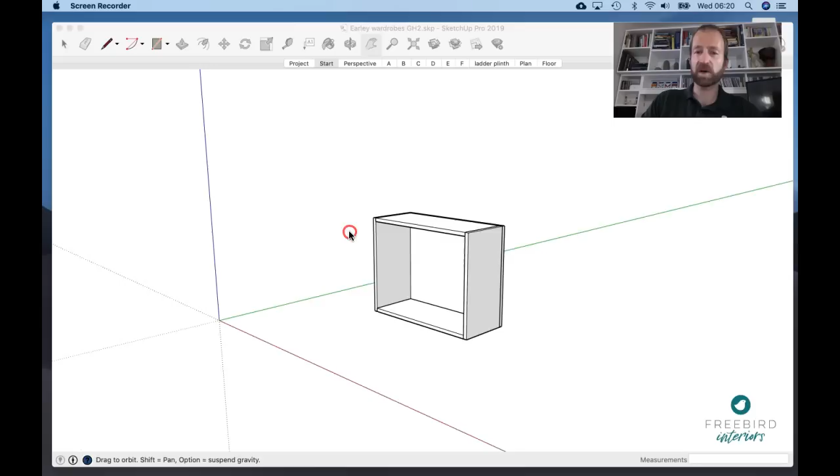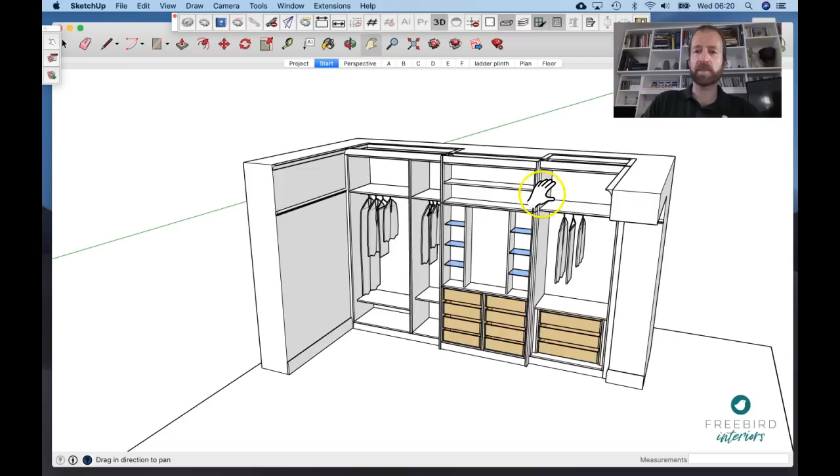And what I want to do is to show you how to make a simple carcass like this. First off, though, I'm going to just talk you through how to get started downloading SketchUp, how to get hold of it for free, demystifying some of that. And before that, I wanted to show you a little bit about what we do with SketchUp so you know what's possible. And I don't mean this to be intimidating if you're an absolute newcomer, but I just want you to know that if you are considering what sort of software you might move ahead with, that in my opinion SketchUp can do probably everything you're hoping to do.

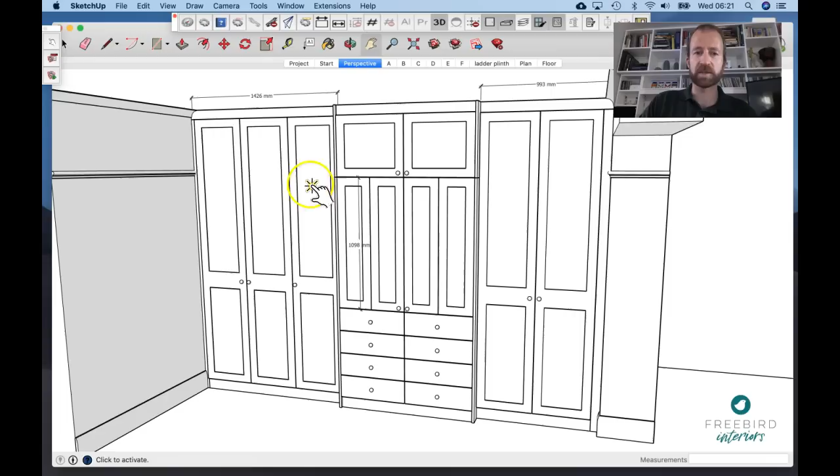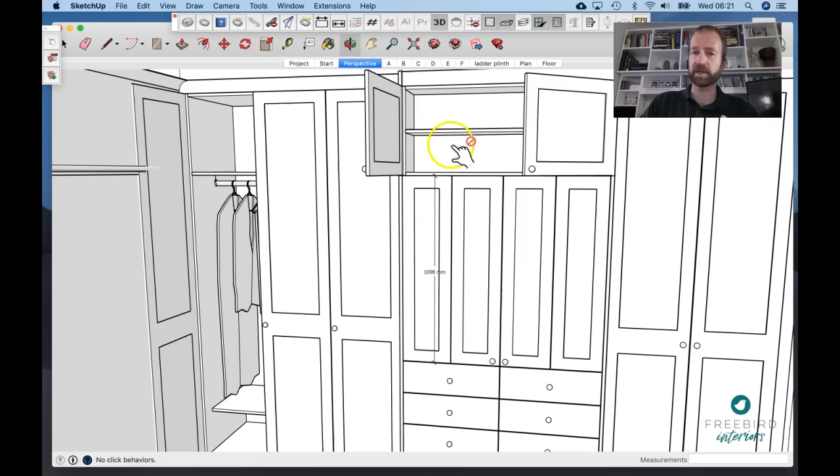So this is an example of a recent project that we've worked on. We can now draw full carcasses with doors on and show the customer exactly how it's going to be from outside and inside. We can animate the opening of doors, drawers, and we can put hardware in. And the really powerful thing now is that we can use these drawings, which are accurate to the millimetre, to output to cutting lists. So once we've drawn them in SketchUp and they exist in 3D,

every one of these parts can be optimized onto a sheet, and we can even tell them to have scribing allowances. So for example, where we've got our scribe strips hitting the wall, it can be drawn to that width, but it can be outputted with an extra 20mm scribe in case of the need to cut it on site.

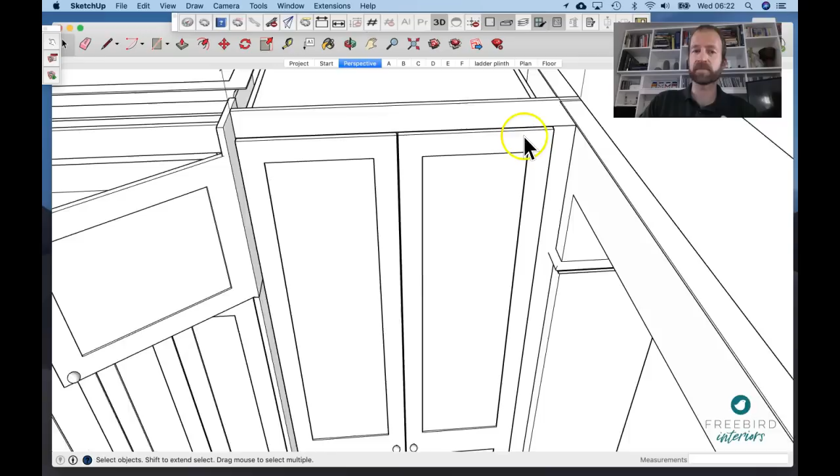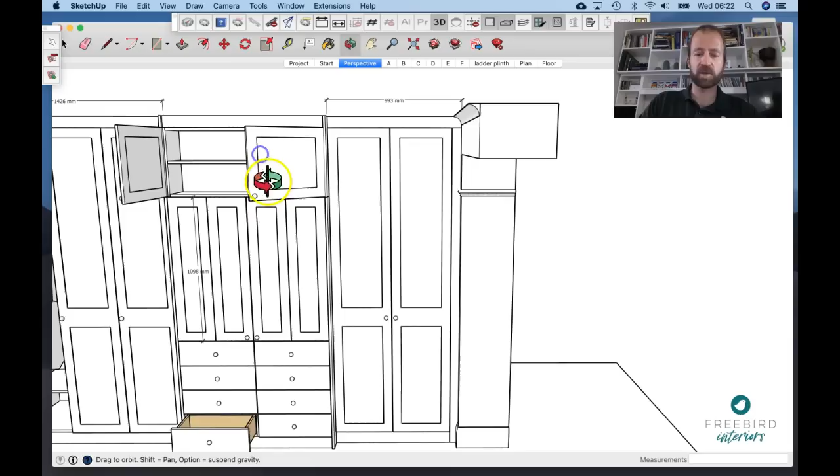So over the years I've tried different things. My background was in architecture. I tried a piece of software called CabinetSense. In fact, I spent £2,000 on that, which is really made for this cabinetry industry. And I just kept coming back to SketchUp because it's very flexible, intuitive, it looks great in front of customers, you can quickly produce drawings, and that's something we do, is we will draw something like this in front of customers now. And I found that CabinetSense was demanding more and more money, even for what I thought should have

been fairly basic features. It's only relatively recently, with the use of certain extensions, that we've got this kind of functionality from SketchUp. So if that's where you want to go, stick with me, because I will be working towards this kind of use of SketchUp, and I'm not going to be giving you stuff you don't need to know that's not particularly relevant to being a woodworker or specifically a fitted furniture maker in the UK.

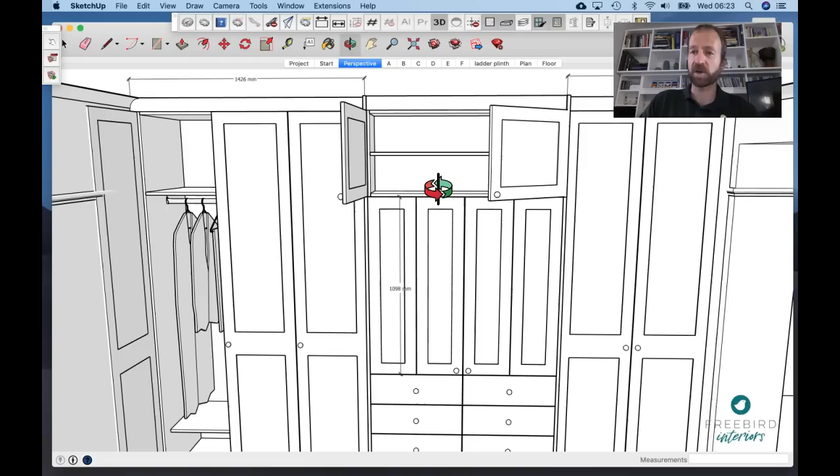So let's get on to how you get hold of SketchUp. Now I suggest you just type SketchUp download into your web browser. And there are two routes you can go down. I'm going to show you both briefly. The relatively new development with SketchUp is what's called SketchUp Free. That is a web browser based version of it. I'm just going to give you the overview of that, but I'm not going to do most of this tutorial on it because the interface is different to a lot of the other tutorials that you would find online.

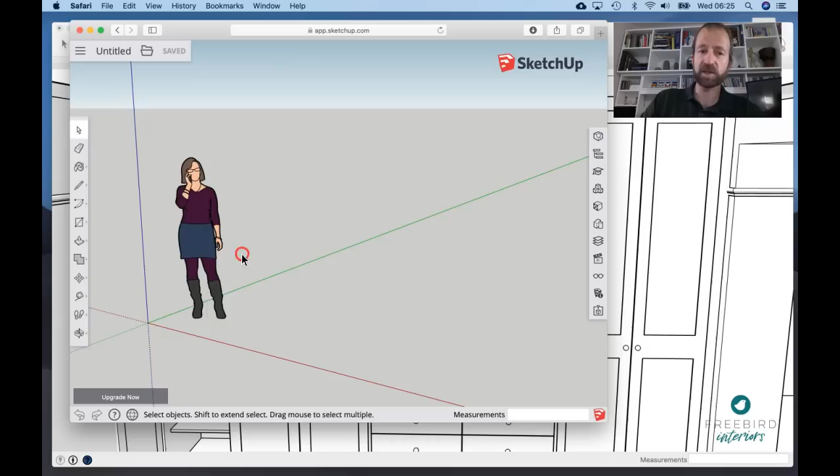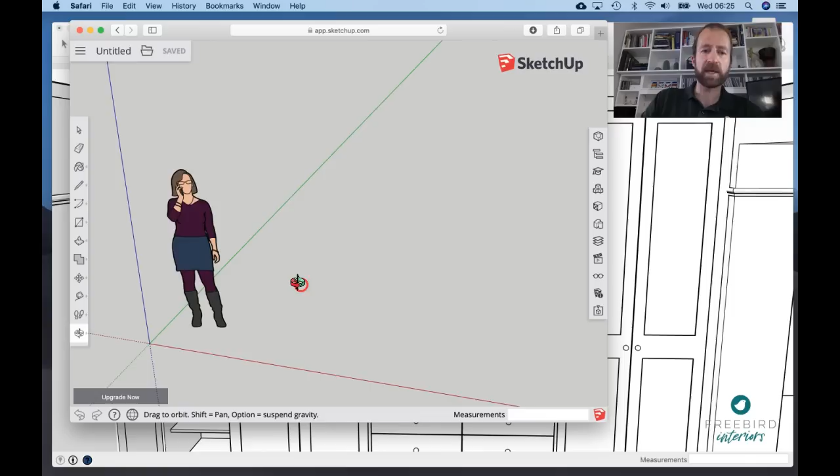However, this is a pretty fully featured version of SketchUp. You will have to create a Trimble ID, so you'll have to log in, which you can do with a Google account, and that's no trouble really. That really just allows you to save your files in the Trimble Connect, as it's called. So Trimble now owns SketchUp. There's a lot you can do in here, but it's much the same as what you will see in SketchUp Make, which is what I want to show you mainly.

So to get to SketchUp Make, what I actually suggest you do is go to SketchUp Download All. So just Google that and find this web page, sketchup.com/download all. It's a bit hard to find directly on the SketchUp site. Now this gives you a list of all the downloadable desktop versions. The ones at the top you're going to have to pay for, the Pro versions. This is the old SketchUp Make, which they're now discontinuing, so they're not updating this, in favour of the free version on the web.

But this is a really great place to start, pretty fully featured, and in fact when you download it you get the Pro version for 30 days, so that causes some confusion. You're actually working on the Pro version, that expires after 30 days, but that just downgrades to Make, which is the free version. So you will continue to be able to use that legally, although strictly not for business purposes ongoing. So you can download your Windows or your Mac version.

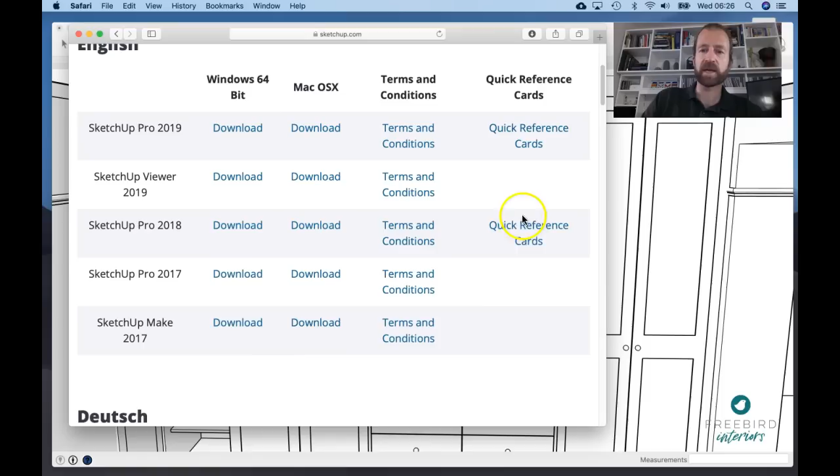Before I leave this page, do take note that you can download some quick reference cards here. This one for Pro 2018 will be near enough the same. Choose your Windows or your Mac. I suggest you download and print this and keep this in front of you, because this gives you the keystrokes which will enable you to more quickly go to the tools that you use.

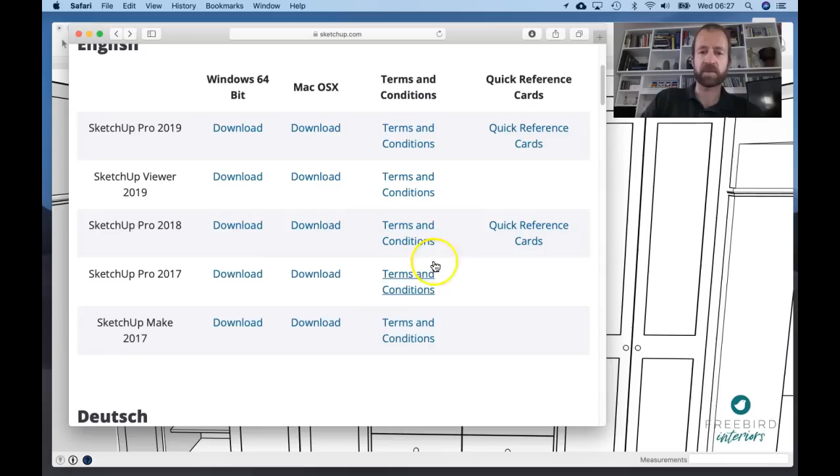So you hit download there on SketchUp Make. I've already done that, so I will bring it up. That's this one. So start using SketchUp down here. It will prompt you to choose a template when you first use it. I suggest you choose the one that's near the top that has this white background and that says it works in millimeters.

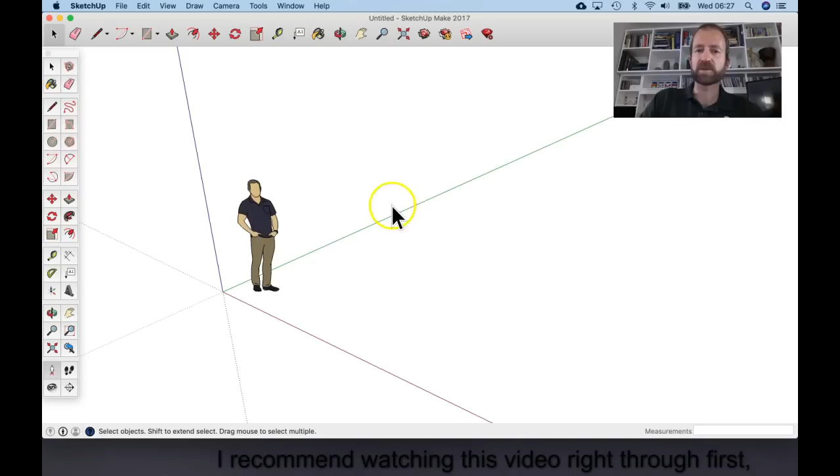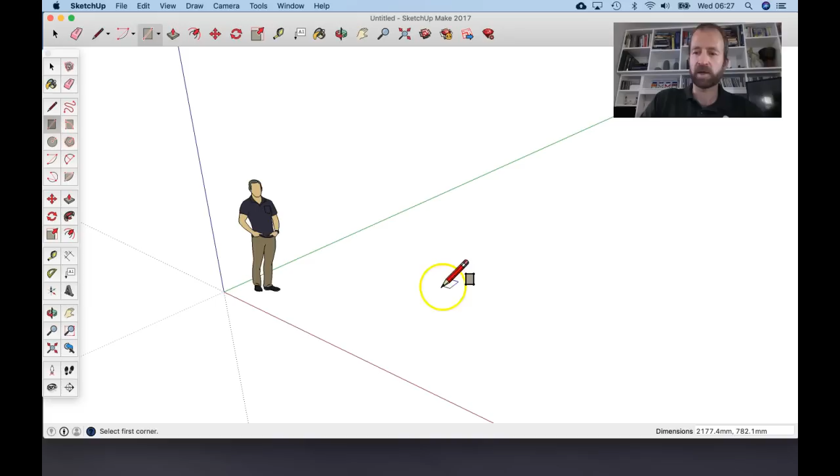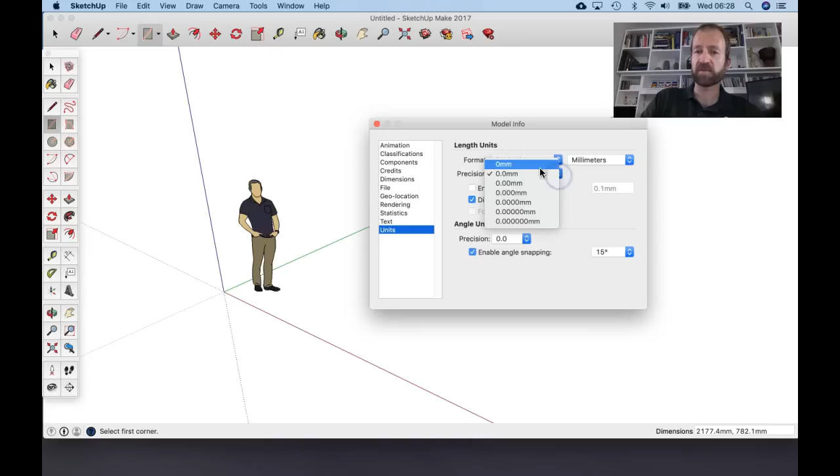If you do find yourself in a template that you discover isn't millimeter based, which you'll find once you get drawing, because you'll see down the bottom right there dimensions once you start using drawing tools. If that's not in millimeters, go to Window on a Mac, Model Info. It might be a slightly different place on Windows, but I'm sure you can find it. So Model Info and Units. And then here you can choose the format and the units. So personally I'm usually working in millimeters, and personally I prefer for it to just be rounded to the nearest millimeter, but you can choose very high levels of precision.

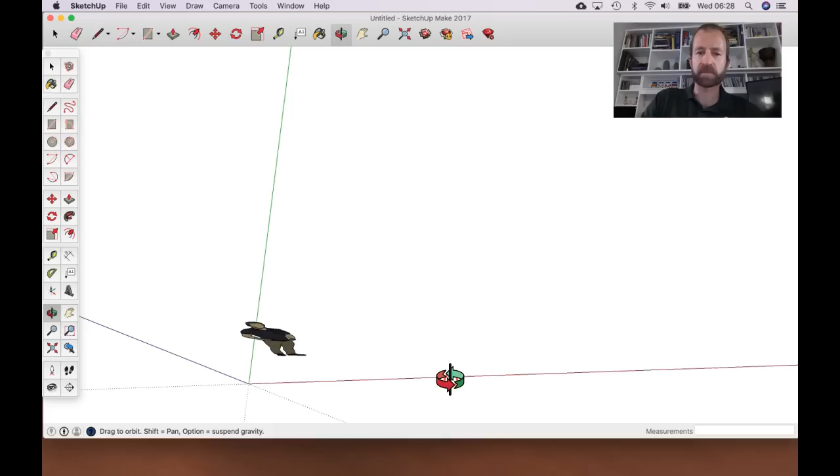So to start with, let's familiarise ourselves with the workspace. What you've got here are axes. So if you think back to school days working on graphs, you had your x-axis going along the bottom. So red is x, your y-axis going that way, green is y, and the z-axis is heading upwards for 3D space. This is the sort of thing that will be helpful as you get more advanced in SketchUp, but just a basic understanding is fine for now.

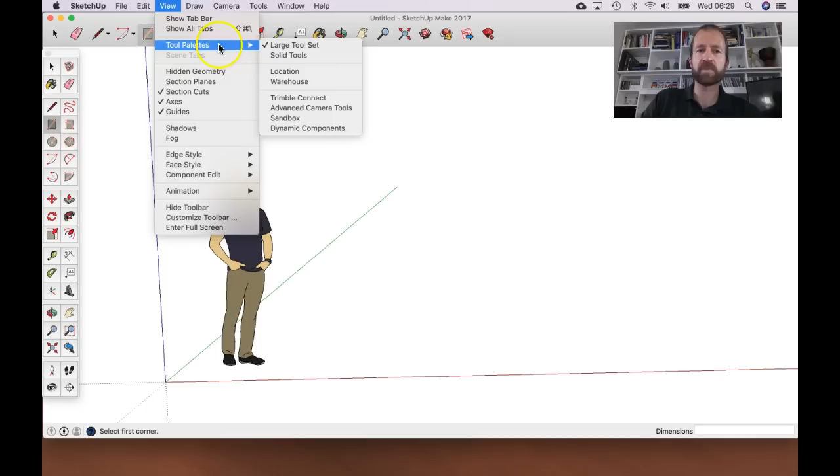You've noticed I'm spinning around in space. Now what I'm doing right now is called Orbit, and you can see how the cursor has changed. You can find that tool in the tool set over here. If you don't have that on your screen, you can go to Tool Palettes. Again, you might have to hunt around a little bit on Windows, but you go Tool Palettes, Large Tool Set, and that will bring this up. So down here are your navigation tools for positioning yourself in 3D space.

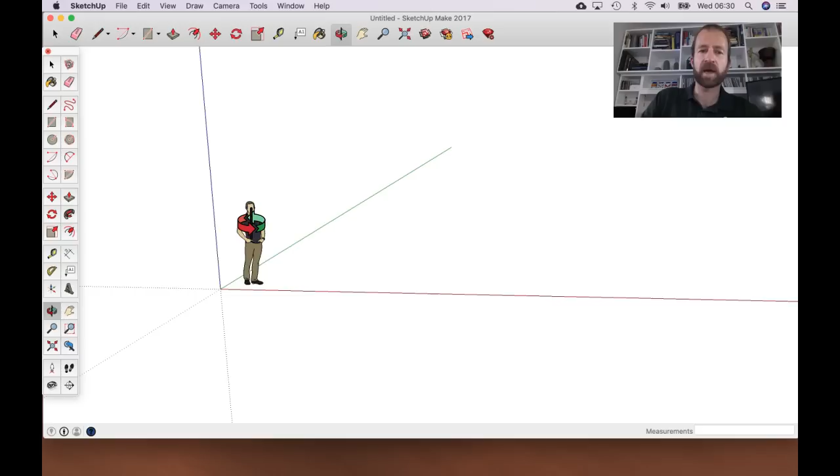So Orbit you can just click on like that. You can also hit O on the keyboard, O for Orbit, and if you're using a mouse with a roller wheel in the middle, then if you press that roller wheel down and hold it, then that will activate Orbit even if you're using a different tool. The roller wheel on the mouse will also zoom in and out, so I'm rolling that back towards me, rolling it away from me to zoom in.

The other tool for navigating around the space that's very useful is the pan tool, or the hand tool. The keystroke for that is H. You will notice that if you hang around over any of these tools on the toolbar, you'll see the keystroke in brackets after the name of the tool. You'll also find these on the sheet that I suggested you print out. So the hand tool will just drag what you're looking at sideways or up and down, whereas the Orbit tool is spinning you around in space.

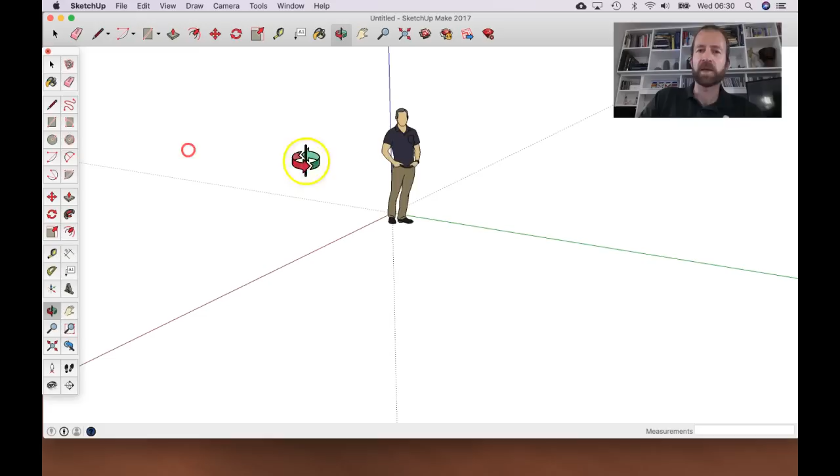Now it's worth noting that there's a special feature to this man. Now he's here as standard to give a sense of scale as you start drawing, but it's specially programmed to always face you. If you're working with a box or something, you would be able to sort of turn around to the back of it.

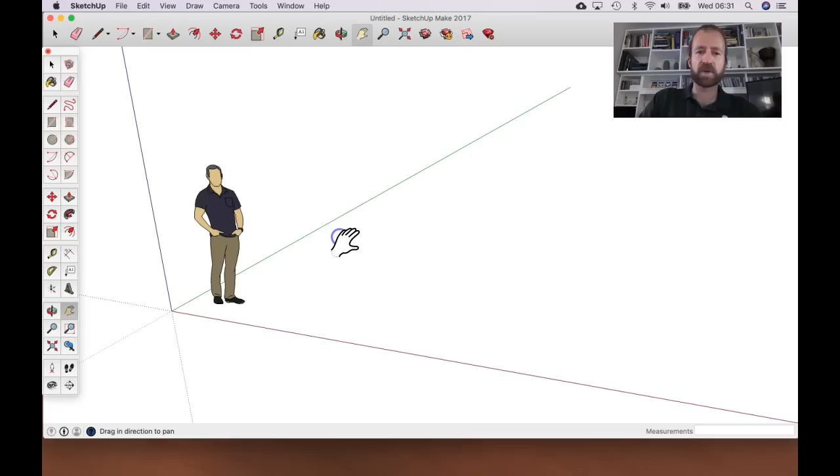Well, let's get started drawing a basic carcass. So select your rectangle tool. It's fairly self-explanatory what these tools do. You can click on it here or you can hit R. When you're ready to draw it, it's giving you a little hint of the face on which the rectangle will be drawn. Now, one of the great things about SketchUp is it's very intuitive. It allows you to just start drawing into 3D space, and it makes certain assumptions when it does that.

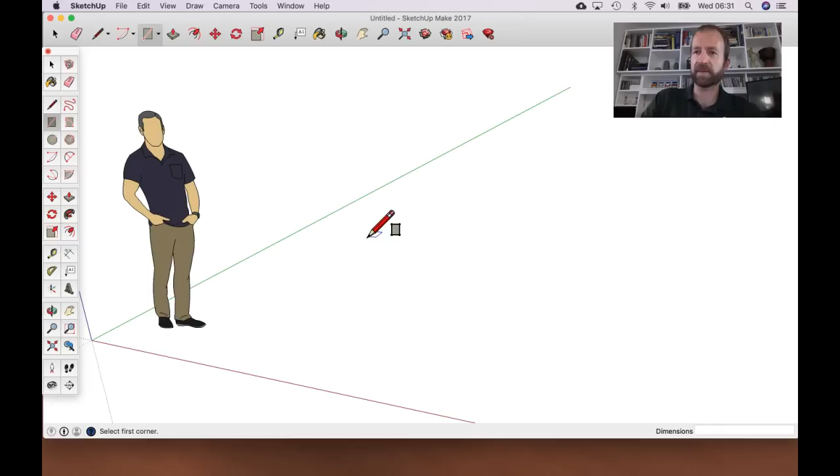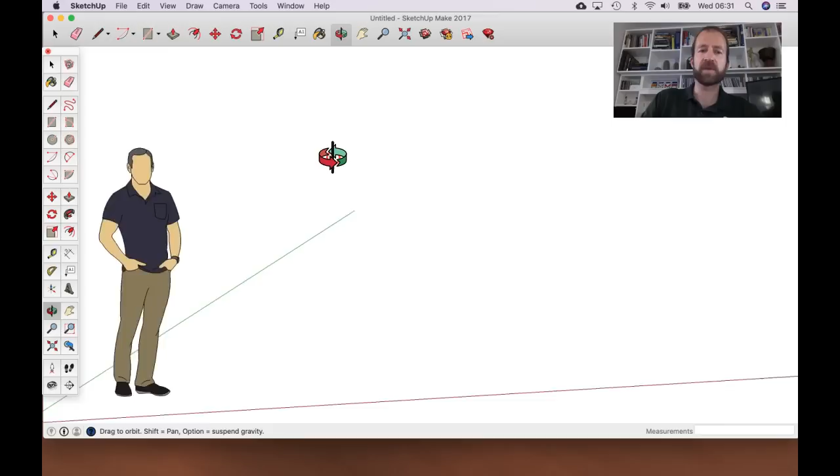So the plane, if you're thinking like the floor plane that you're looking at, so the view is most orientated towards the floor plane, that's where it's assuming you want to draw this rectangle. So if we start drawing, that's where it's going to be. Just hit escape to cancel that. If I was to be facing more upwards, then it automatically assumes that I probably want to draw more in that plane. You'll get used to this.

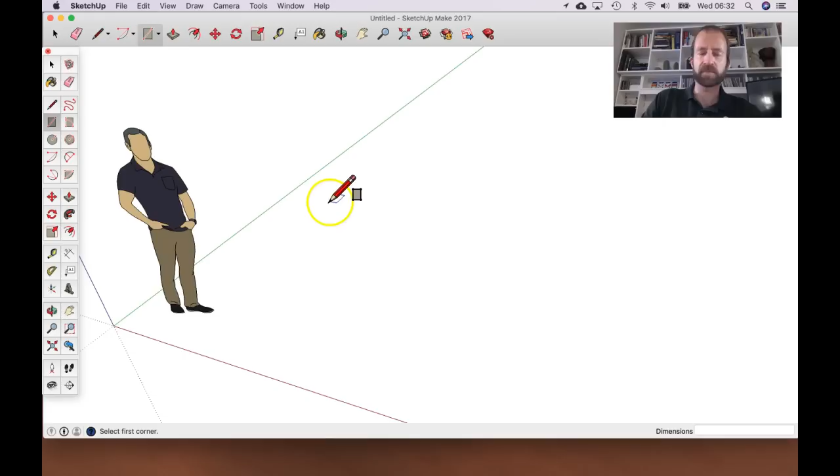Just hit H to pan back to get myself in position. So R for rectangle. Now the way that I recommend you draw is you click and release, and then the action is in progress, and the size of the rectangle will be set when you click again. Now you can see the size that you're drawing by looking down at the bottom right there.

So that's currently 766 by 766 millimeters. That's just fairly arbitrary, it's just where I'm floating in space. It's also giving me a helpful guide by showing me that it's square. But I can break away from that, and that now is a golden section. So that's sort of traditionally a well-proportioned rectangle.

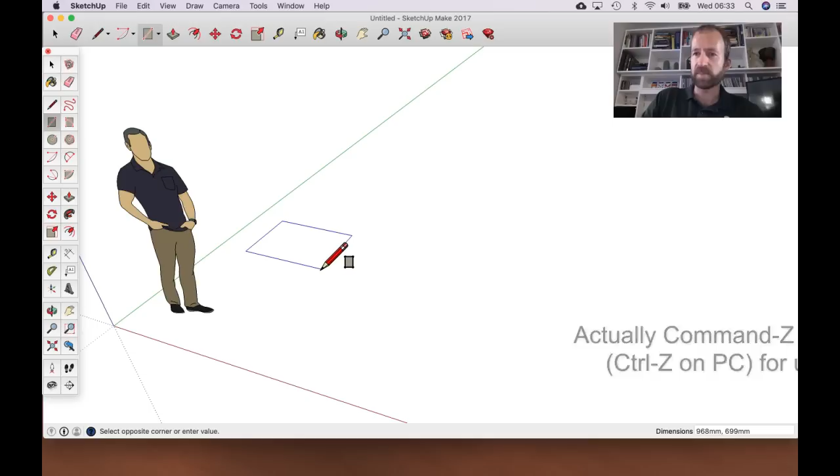So I can just click and make the rectangle, but to work with precision, so I'm just going to hit Command Z to undo that. To work with precision, it's better that I tell it the exact dimensions I want it to be. So the dimensions box down at the bottom right there, it will read out what you're doing, but it will also receive instructions.

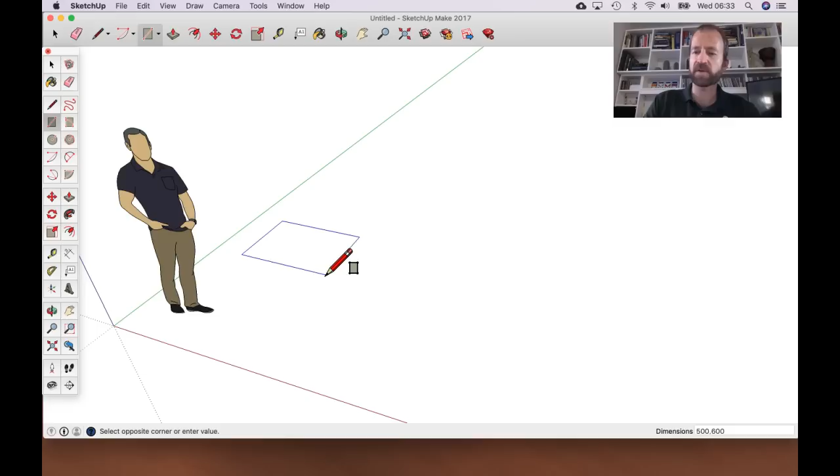Now the way you give it instructions is you don't have to click into it or anything, you simply start typing. So I've activated a rectangle by clicking once and releasing, and I'm going to make this rectangle, let's say 500 by 600 millimeters. You don't have to type millimeters because you've already set that up as the units that you're working in. So it's 500, 600. Hit enter.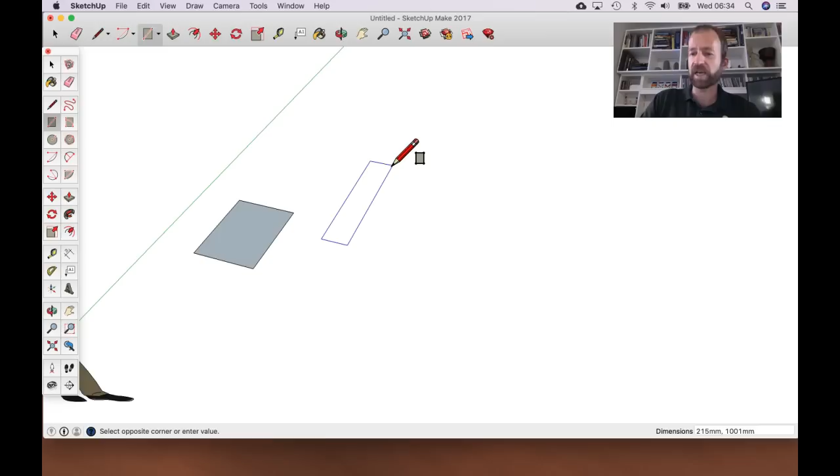Now it may be helpful before you type in the sizes to just observe the long and short direction. So you see how I'm dragging a rectangle out here, you can clearly see which is long and which is short, and you can see in the dimensions box that the short dimension is coming first. So that's actually the X dimension followed by the Y dimension. Often it's useful simply to start dragging out the shape and just check which way round you're going to need to type the dimensions in.

So now if I wanted this to be, say, 1000 by 100, I've just typed that in, 1000, 100, and then I've hit enter. So hitting enter does the job of just clicking to finish. You don't have to then click once you've typed the dimensions in.

Now let's make this rectangle the base of our cabinet. So now we're going to go to a 3D operation. So you've effectively just drawn a 2D rectangle within 3D space. We now want to give it some thickness. And you do this using the push-pull tool. So you can click on it in the toolbar, or you can go to the keystroke P.

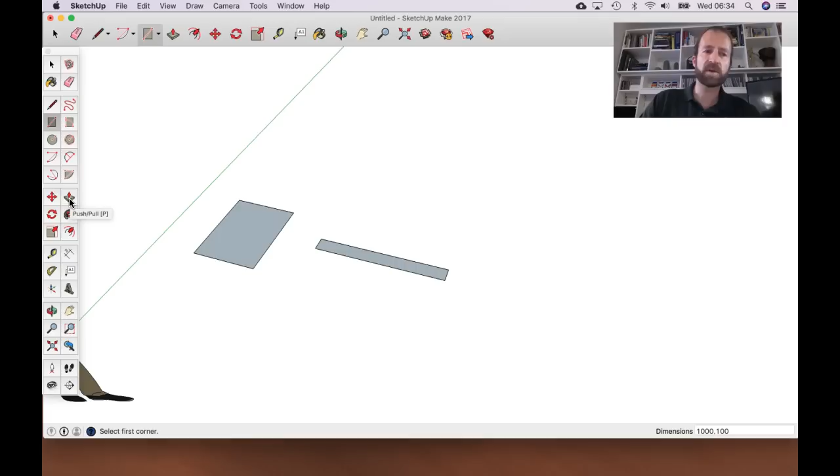Clicked on that. I'm hovering over surfaces, and the surface that goes dotty is the one that I'm going to work on. So click and let go. And then I am in process of extruding this face into a 3D shape. Now there's just one dimension in the bar down at the right there, you see. So I can just type 18 millimeters for my board thickness, hit enter, and I've got my 18 millimeter thick base.

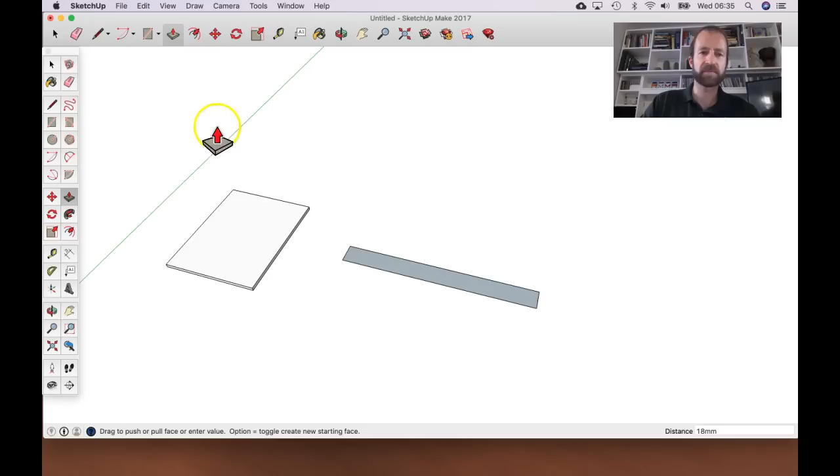I mentioned faces. The terminology in SketchUp is that you're working with edges and faces. So a line is an edge, and you can individually select that. Now I've gone back to the pointer tool by hitting spacebar, and that's a very useful keystroke to know. So it tells you there as you hover over it. So anytime you've got a tool active, you can just hit spacebar to go back to the selection tool. And I've hit the middle roller button to orbit. So this starts to become second nature to position yourself in space.

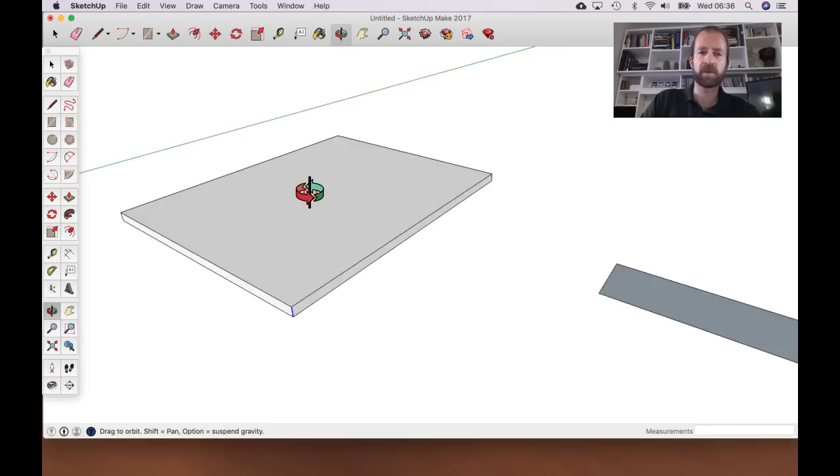So yes, as I was saying, you've got your edges, which you can just select by clicking on, and your faces, which can only exist when they're bounded by edges. And faces will automatically appear when you create a 2D shape which is bounded by edges.

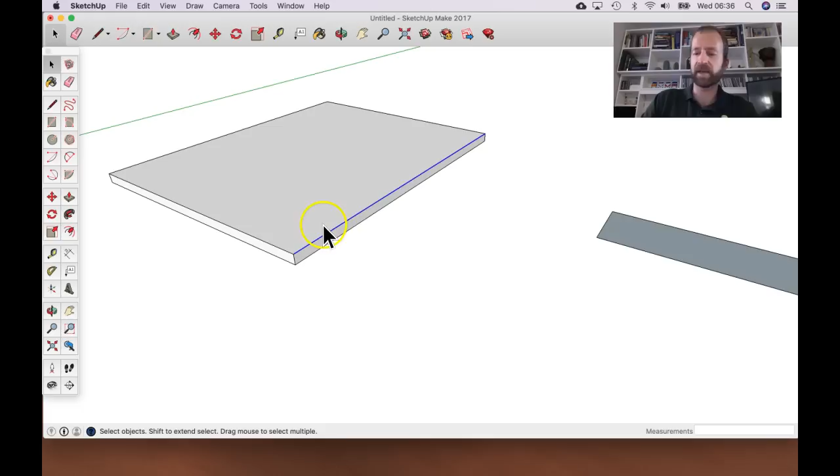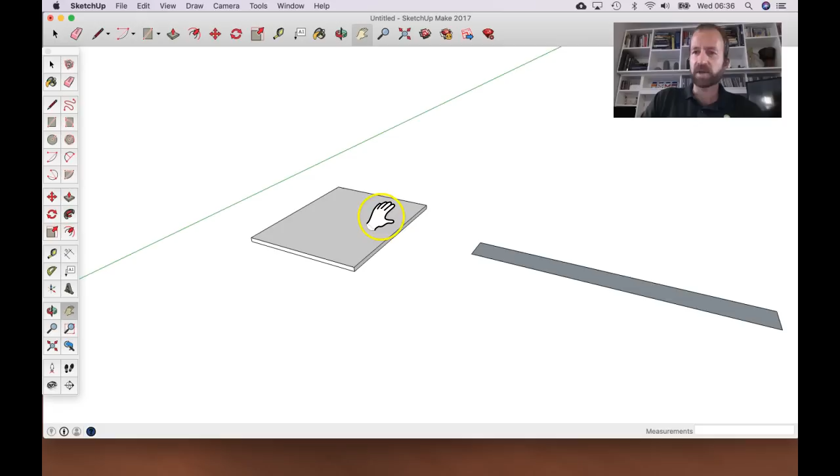But you can individually select each of these and you can delete them. So if you just select that and hit backspace or delete, that'll delete. But you see it's had to delete the faces that it was bounding. So Control Z, or Command Z on the Mac, undoes that. Now we're going to start drawing the sides of this cabinet. Let me just delete that.

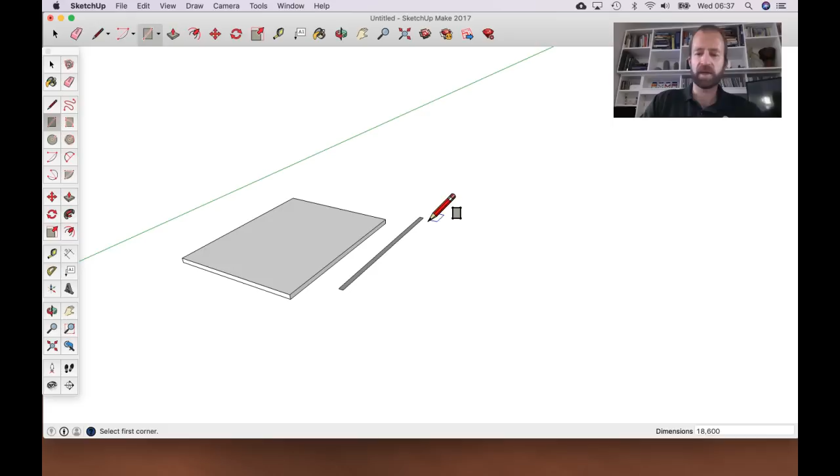And once I've drawn them, I want to talk to you about grouping your geometry, which is very important in SketchUp. In fact, if you don't do it, things will be a lot harder for you. Let me draw something else and this will start to make sense. I'm going to deliberately draw the side away from the base. So let's make that 18mm thick on its edge, 600mm. And then P for push tool, or push pull I should say. I'm going to extrude that out, let's say 800mm, hit enter.

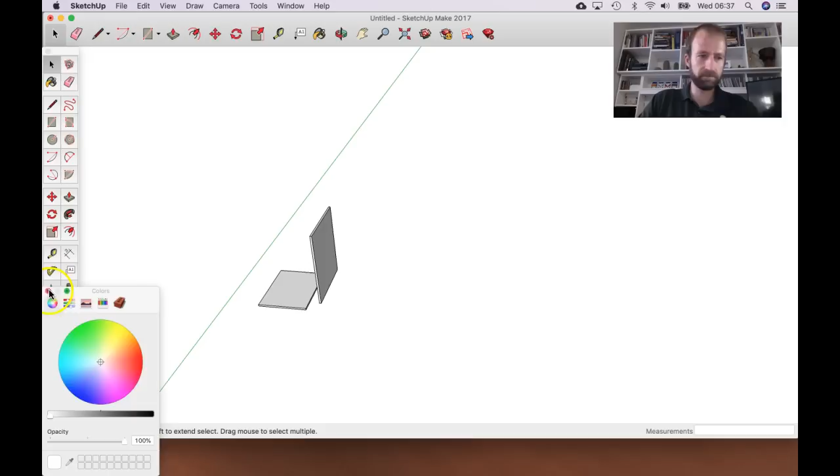So I've got my two objects here that I want to start putting together. Now to put them together, let me just delete that man. To put them together I need to select one and move it to the other. Now there are a few ways of selecting. You can just click on a single item, or to select a lot you can drag a bounding box. So I've gone back to my pointer tool

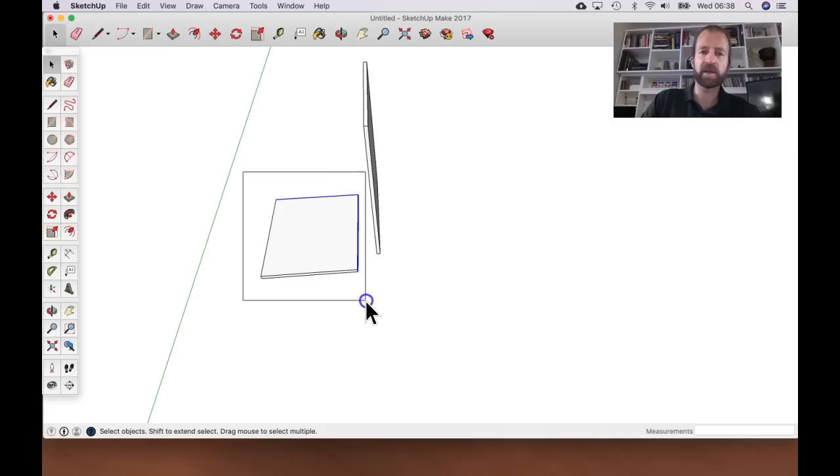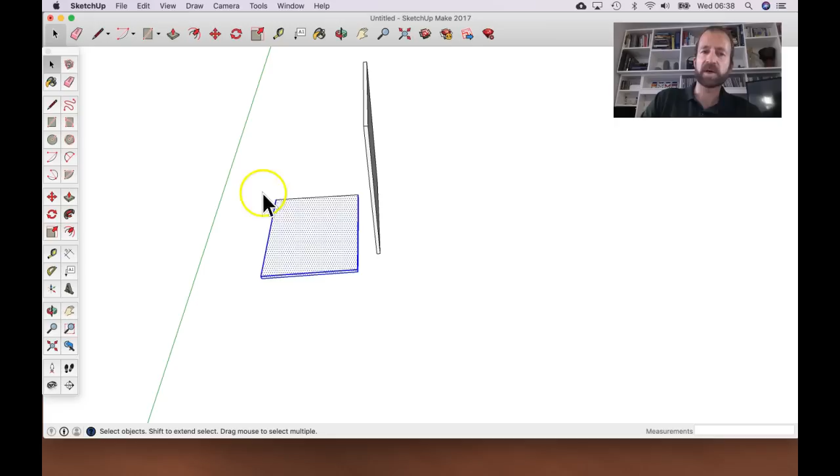and see now, yes, so I'm just dragging, and whatever is contained within the box, if I've dragged from left to right, will be selected. So that's selected all that geometry. So if I just do that, it doesn't select anything. If I was to drag from right to left, then whatever is touching the box will be selected. So that's selected the parts that are touching, but it hasn't selected the lines at the top there.

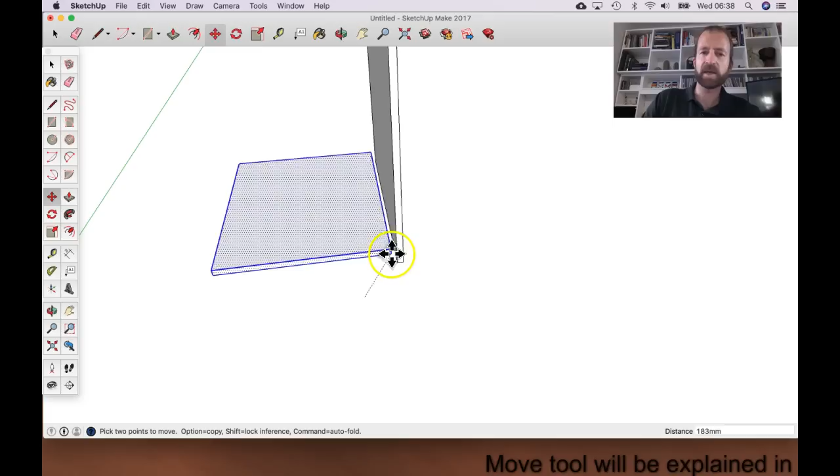So to bring these two items together, I can select one of them. I have to be careful because I just selected that line over there. Select one and then drag it together. And this is where we'll start to get problems because we haven't grouped geometry. So that seems to be okay. However, if I now want to independently edit one of these sides or move it elsewhere, I can't really do that because it's stuck together.

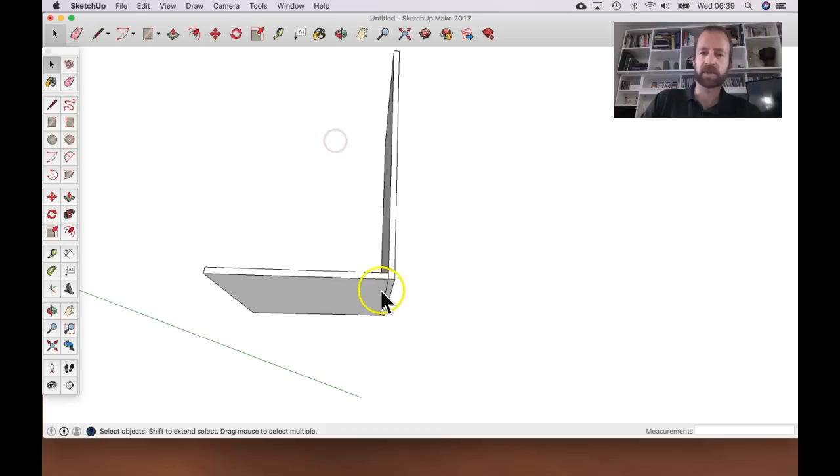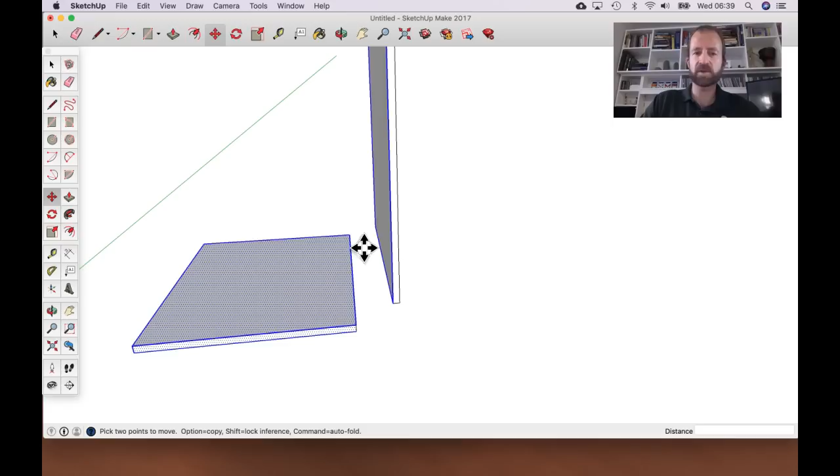So this line now has become shared. It's just one line. And if I try to individually select that and move it, which I'm doing with, I should say, the move tool, so that's keystroke M. And SketchUp has given me a little bit of help because it's showing me these endpoints to grab. You see how it's sticking together and it's affecting the geometry of the side there. So I'm just going to escape from that. I'm going to do Command Z or Control Z to undo that.

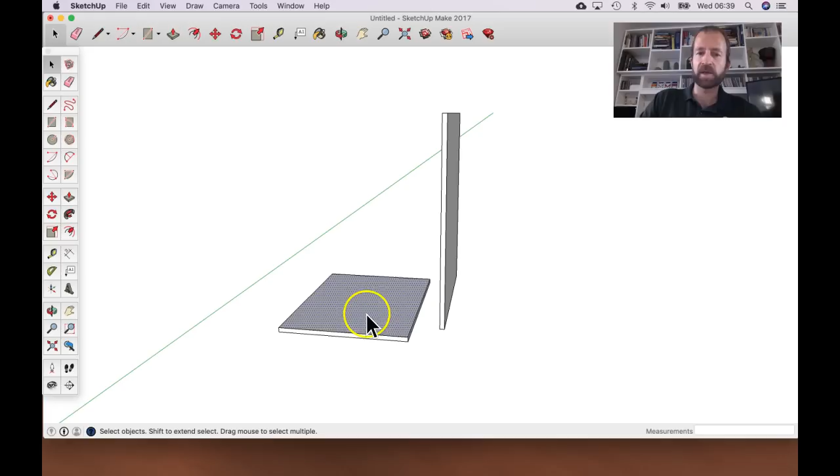So what I really want to do is to independently group these sets of geometry. The way to do that is you start by selecting, which you can also do by triple clicking. So that's actually my preferred method. Double click will select the face and the edges around it. Triple click will select all of the geometry that's connected to what you're clicking onto. Once that's selected, you can right click and go to make group.

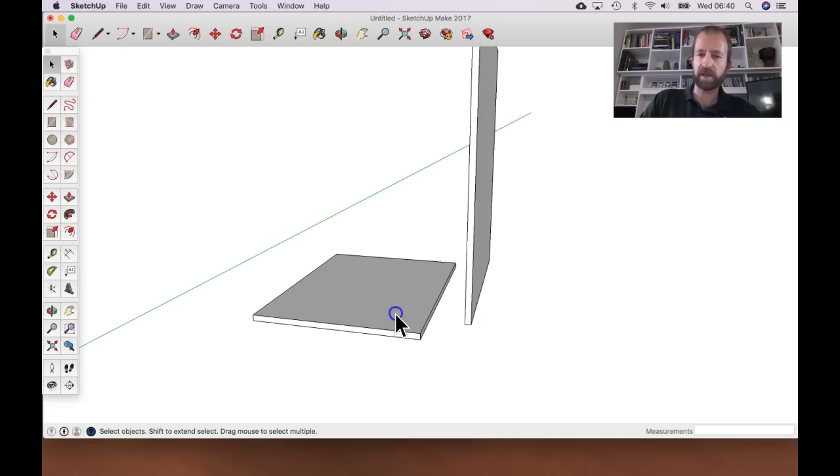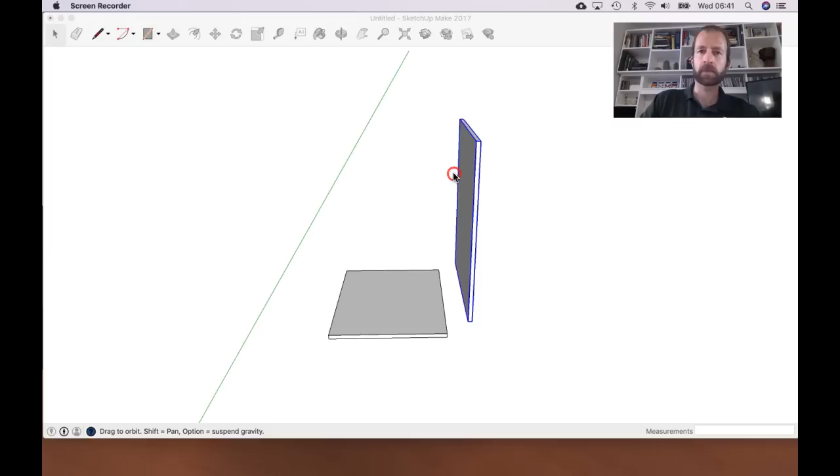And what that means is that when you single click on that now, it's considered as one entity and it's no longer sticky, so it's independent within itself. So let's do that to the side here as well. Triple click that, right click, and down here make group. Now you can also go to make group under the edit menu. It's greyed out now because I've already made that a group. So now we've got these two independent entities, we can move them together and they won't stick.

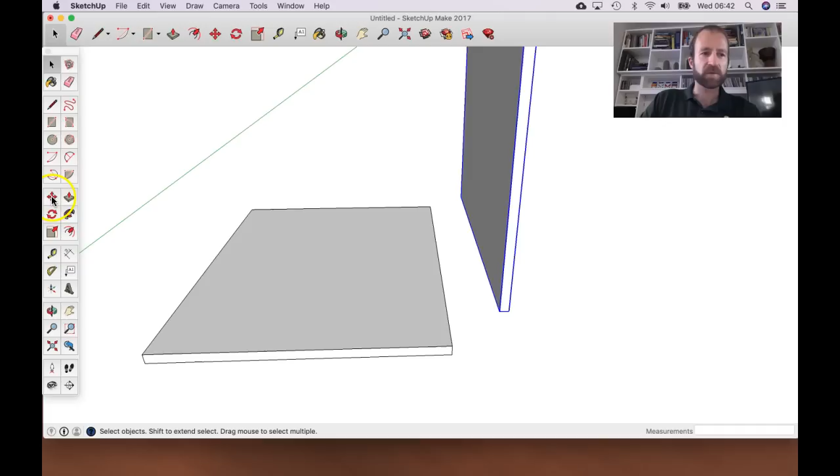Let me just show you the move tool because I think I went a bit quickly over that before. So the move tool is over here, it's keystroke M, and the geometry that you've got selected is the one that will move when you activate the tool. So like most tools, I'm going to just click release, do the operation and then click again to position it. So whenever I move, I'm always wanting to work off a precise reference point so I can precisely place the part. It's worth knowing that the move tool will work from anywhere, so you can just click in space. So if I just click over here, then I'm bringing that part with me.

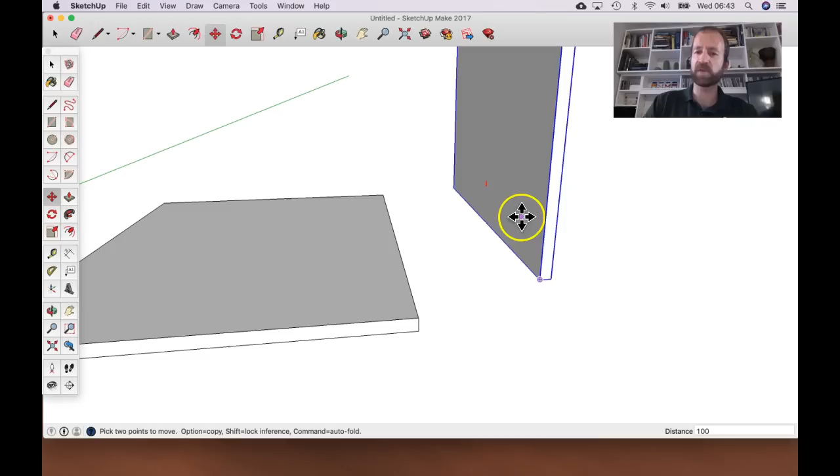So I can just click randomly, and I can also tell it a distance to move, again by simply typing in. So if I just wanted to move it 100 millimeters, I've set the direction with that dotted line, that's telling me it's in the direction of the red axis. I've typed in 100 and I've hit enter, so that is a way of moving. But most often I'm wanting to take a precise point which I know will meet another precise point, which is indicated there by that circle. Now that process is called inferencing.

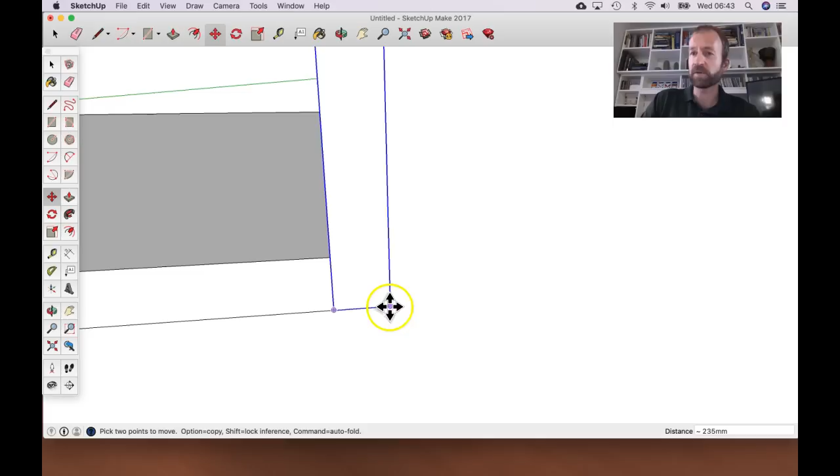SketchUp's very clever at giving you a little bit of help. So it will let you know when, if you were to click, you are on that line. It's sort of snapping to that, even if you're a few pixels away as you're moving the cursor. It will let you know when you hit the midpoint, so that's the midpoint symbol, and it'll let you know with a different symbol when you're on an end point. So that's the end of a line or a few lines where they meet. So I've precisely positioned that side where I need it to be.

Now I want to create another side that's the same. So using the move tool again, rather than redrawing this, I can simply copy move it. So you start the move operation in the way we said. I'm going to click it from this corner now. While that's in progress, I'm just going to hit Alt or Option on the keyboard.

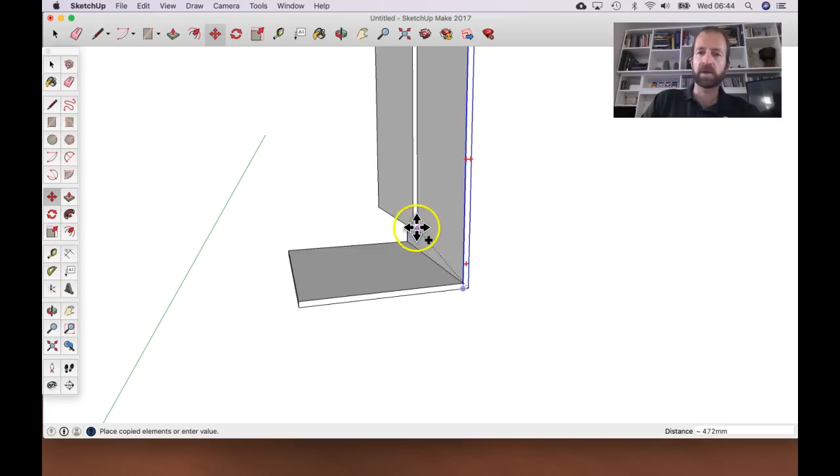And if you see there's a little plus next to the move tool, that's converted the move tool to the copy move tool. If I hit Alt again, it's just moving it. So I can do that mid-operation. And I'm just going to reference that to exactly where it needs to be, click and complete the operation.

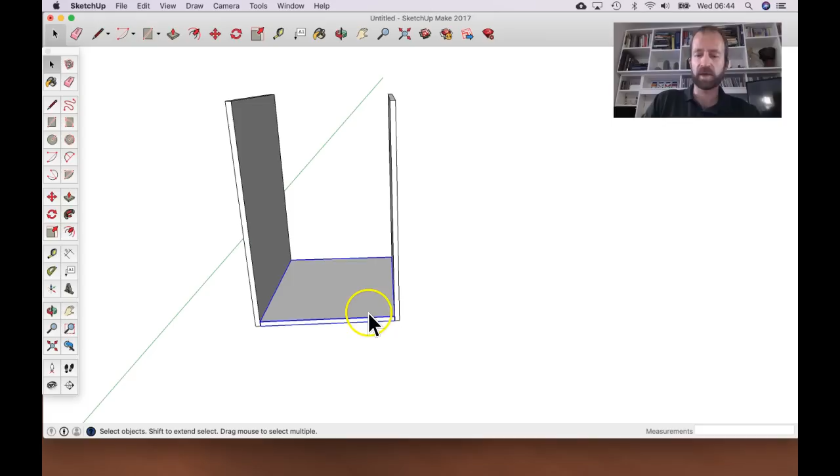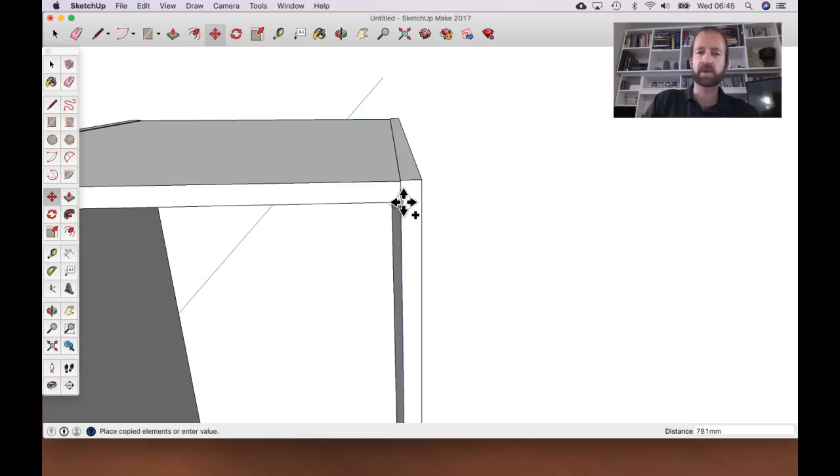So in a similar way, I can take my base. I've just been using keystrokes there, spacebar to go to the pointer tool, click to select it because it's grouped, and then M for move, take my reference point, click, hit Alt or Option on the keyboard to copy it. And now in fact you can see I should have clicked the other corner because now I can't precisely position it. So what I could do is just place it there.

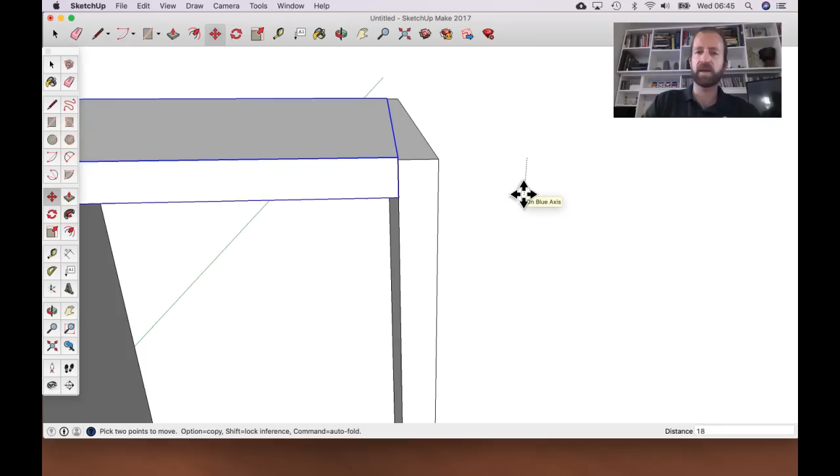And just to show you again the way that you can work with the move tool, I've got that part selected. I'm just going to click randomly anywhere. I've set my direction. It's sort of snapped to the blue direction, which is the Z axis, the up and down axis, so I know that it's sliding perfectly vertically. And having set that direction, I'm just going to type in 18, and that's now exactly where it should be.

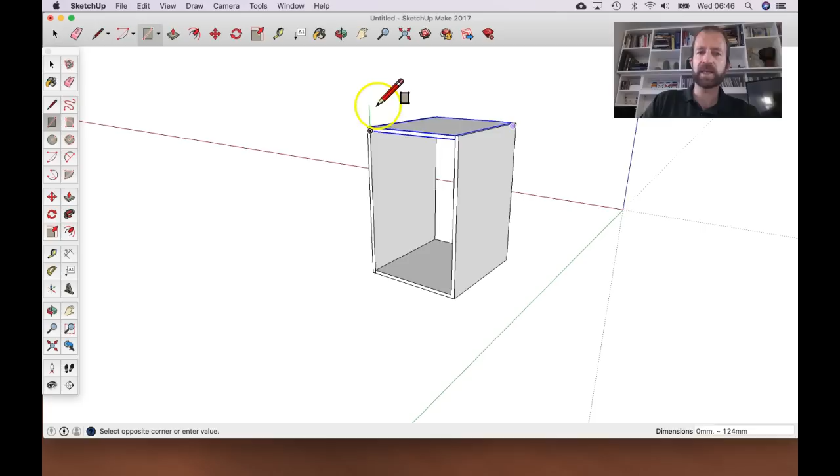So now I just need to draw my back panel, and let's assume that it's going to be an inset panel. So I'm going to hit R for rectangle. Again, using inferencing or snapping, it's telling me that's on the end point, so I know that's exactly where it needs to be. And as I draw the rectangle, it will just guess where I want it to be lined up, which plane it wants to be drawn in.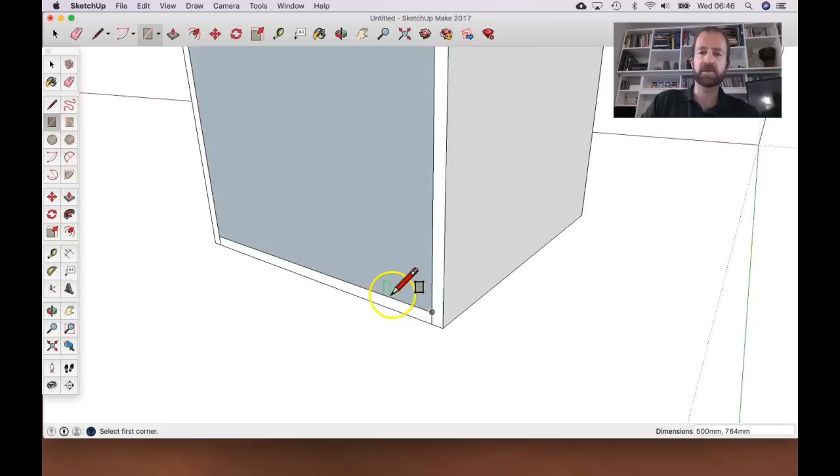So here it's assuming that I just want it to be stuck to that face. Here it's again sticking to that face, which would make a sort of angled rectangle. As I come over to here, it's snapping again to where I want it to be. So click to do that. P for push-pull, and I'm going to push that in. Let's say it is an 18mm back panel.

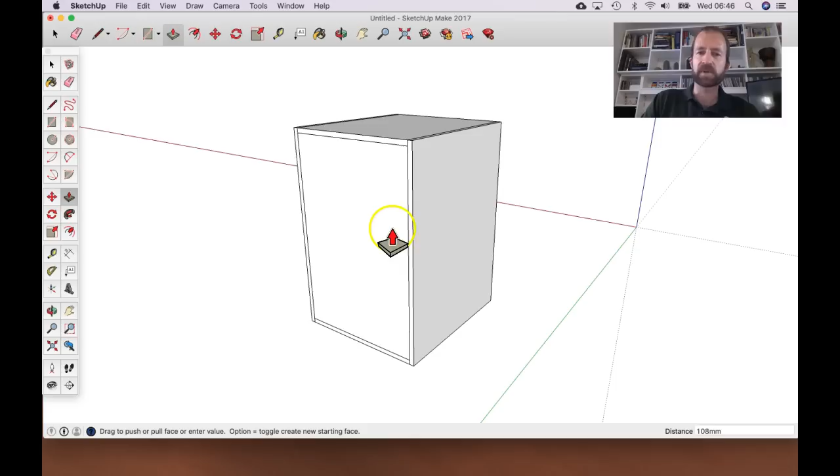So although you can't see it, I'm pushing in that direction. It is actually pushing. I come this way, it's going that way. So once I've set my direction, I can just then type in the actual distance I want it to extrude. So I'm typing in 18, hit enter, clicking the wheel on the mouse to orbit, and there's my back panel as it should be.

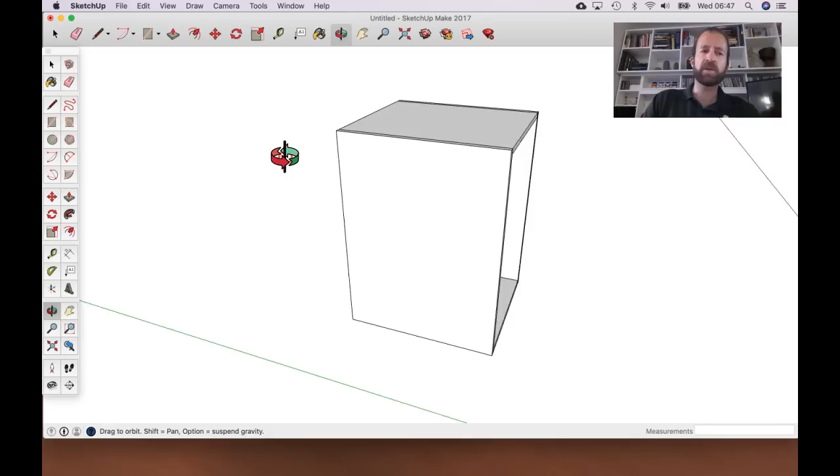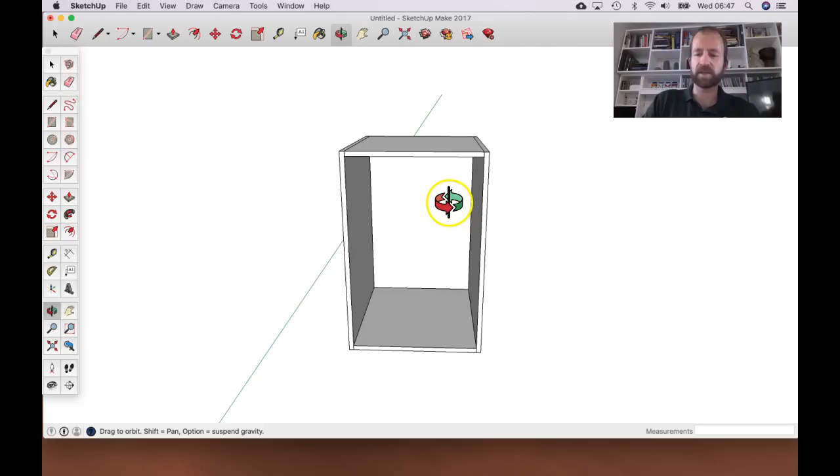Now note, when you use things like the orbit tool or the hand tool, just hit H there, well, what I was going to say actually is, you see I was on push-pull. When you use the orbit tool on the mouse, it reverts to the tool that you were using. If you go right ahead and select it, either by clicking on it or by using the keystroke, then it stays on that tool, and you'd have to use the correct keystroke like P to go back to push-pull. I'm actually going to hit spacebar, which takes me to the pointer, which tends to be the most useful thing.

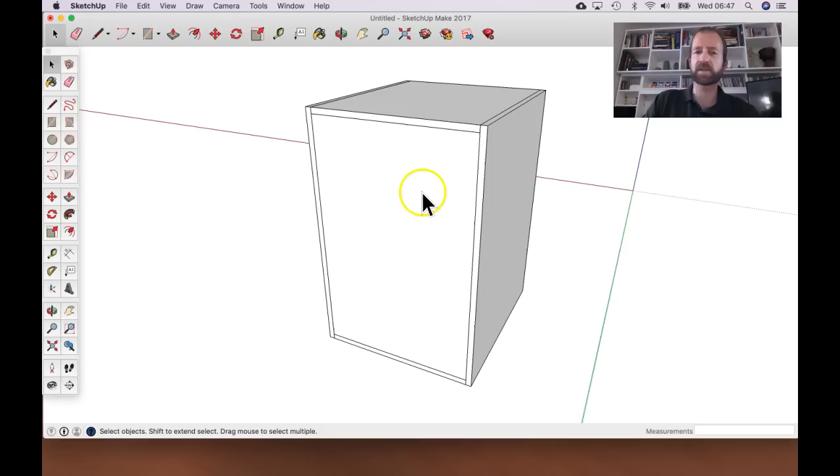I'm going to select that, which, as I said, my preference is the triple click. I'd like to maybe just orbit round to check that the rear face is not selected, so I'll probably just double click. So triple click, that's all selected, right click to make that a group, and there we have our carcass. Well, I think that's about it for now.